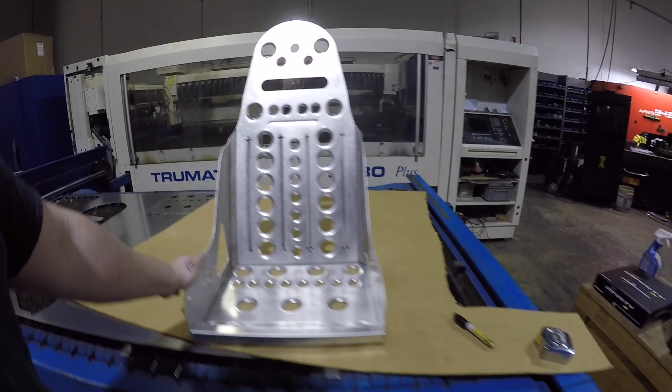Hey, what's up guys? Today we're going to make an aluminum seat in this video. We're going to start from the very beginning, running into the office to start the programming stage.

We're going to get it sent out to the laser to get that thing cut out. We'll go through a couple other fabrication tricks, maybe some dimple dies and some bead rolling, and then toss it over in the brake and bend it up to see how this thing turns out. So stay tuned, hope you enjoy the video. Peace.

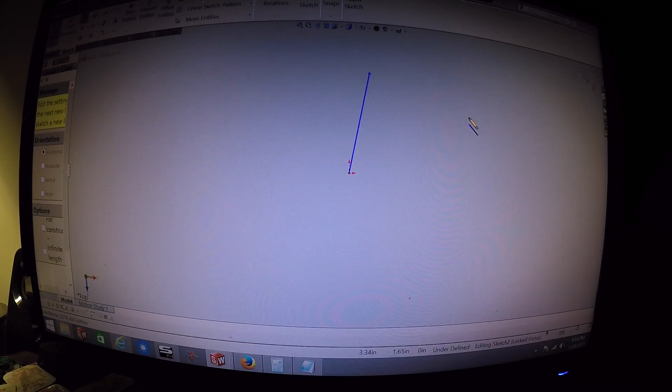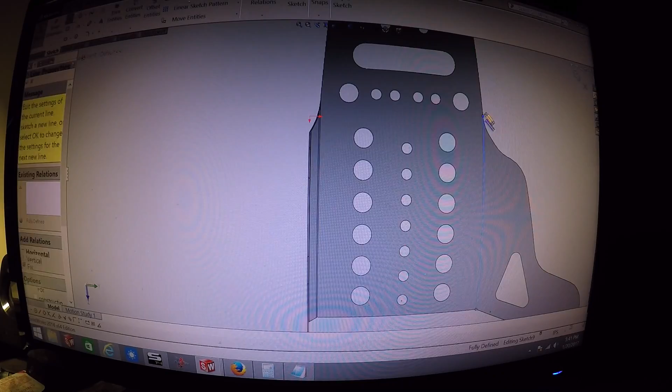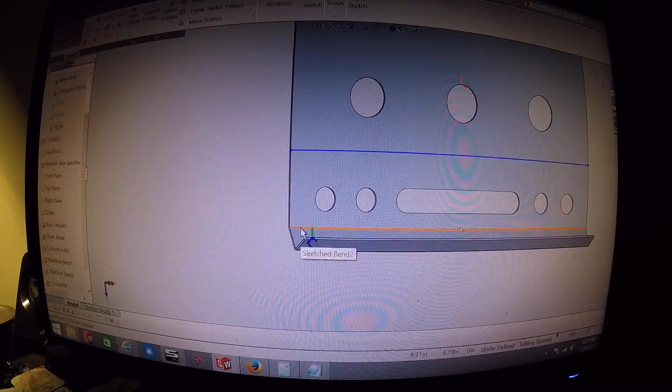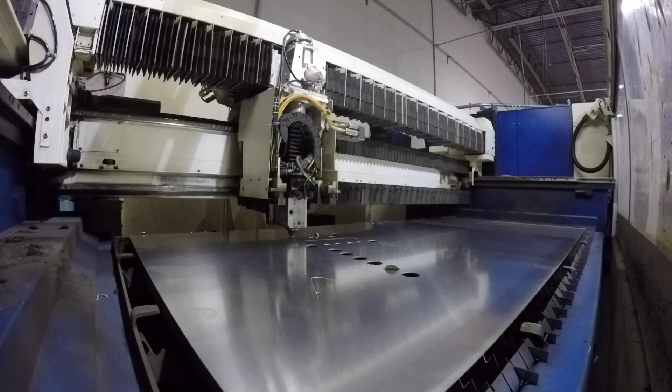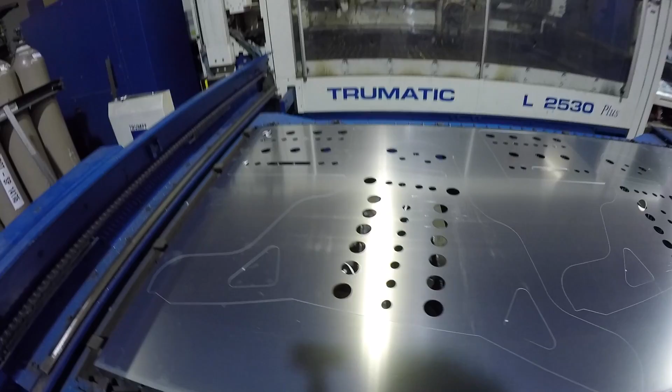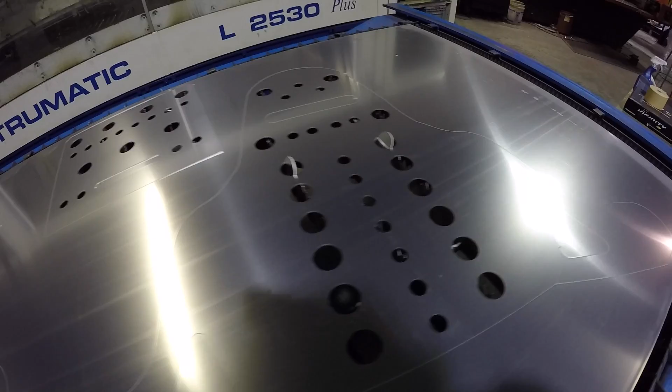Alright guys, so I just finished cutting these seats and I wanted to turn the camera around and show you the finished cuts. Looks like it cut really nice and smooth. We're going to go ahead and take these over and I'm going to dimple die out all the holes first in the big RG100 hydraulic press.

We'll get all those pushed out in the seats and the bases, and then we really just have a few bends in the main portion of the seat, and there's actually more in the base of the seat. We'll get those knocked out between today and tomorrow, and we should be able to mock this thing up. I'm pretty excited to see how it looks.

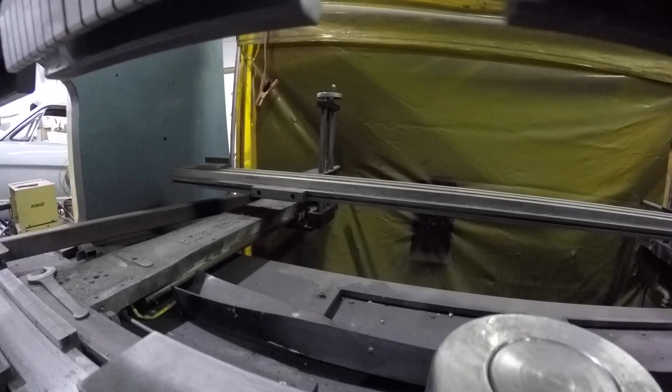Alright, so this is my dimple die. I've had this for a few years. This is 1 3/4 inch, and over here I have a 1 inch. That's what we used to make all of the hole sizes in our part here.

So what I'm gonna try and do here is let me grab my little base for my camera.

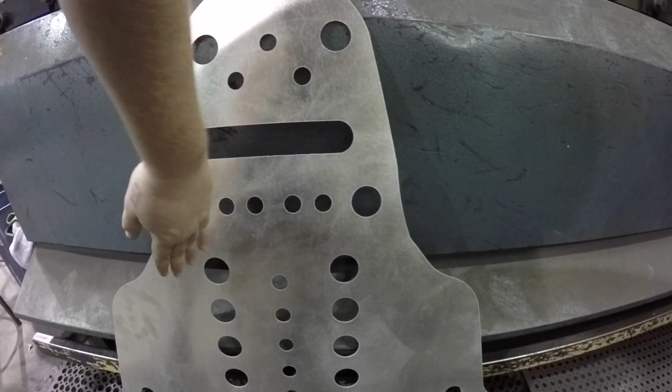The other thing that I've done real quickly is I took the DA and ran it over the whole back of the part just to get rid of any burr. There was no real visible burr from the laser, but if you ran your finger along it, you could feel where the cut was on the back side. So now we're going to use that as the front because it's a lot more uniform, and any imperfection or scratch from the raw material, shipping, or handling doesn't matter because it's gone now. But we'll leave the back raw, so at least there's a contrast.

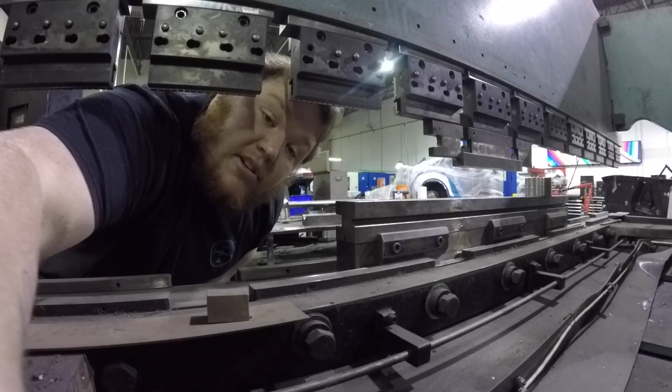Got my little base here. Let's get this set up in here if we can. That should be good right there.

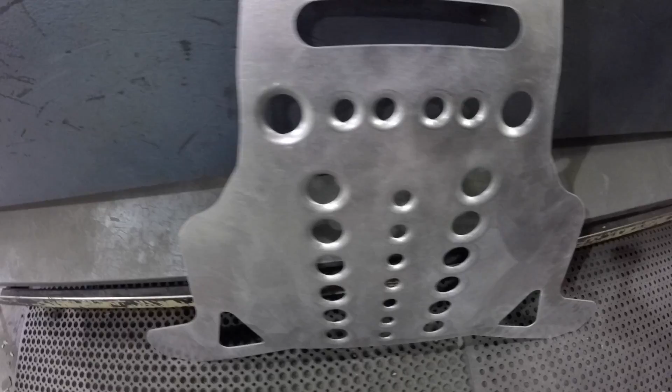There she is. Get a better idea of the dimples from the back side. Give me the light.

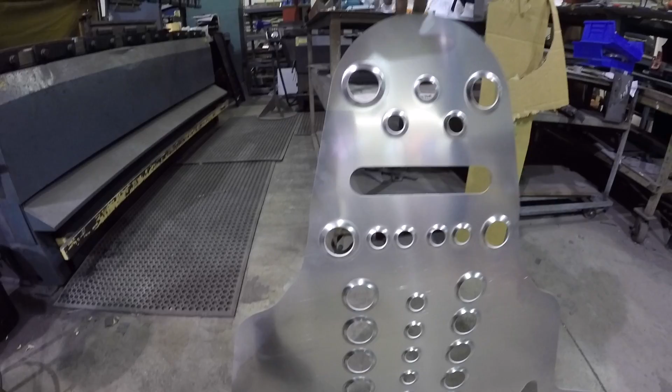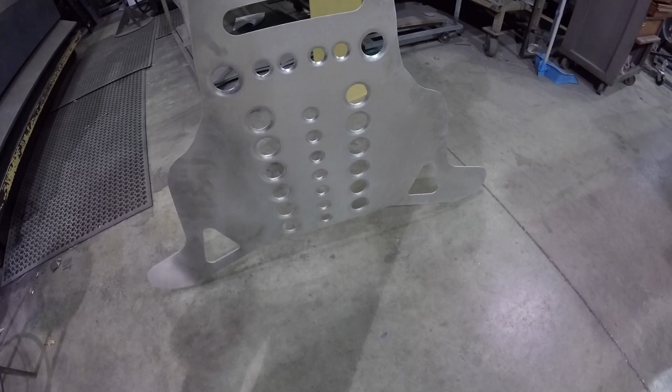Alright guys, so this is going to be my stopping point for tonight. Tomorrow I'm going to come in and bead roll those seat panels, and then I will proceed to bend them. I have to bead roll them first, otherwise you can't.

I'm going to try my best. I'm not the best bead roller in terms of artistic bead rolling or super precision work, because when you're rolling anything other than a straight line, if it's off at all, it's super noticeable.